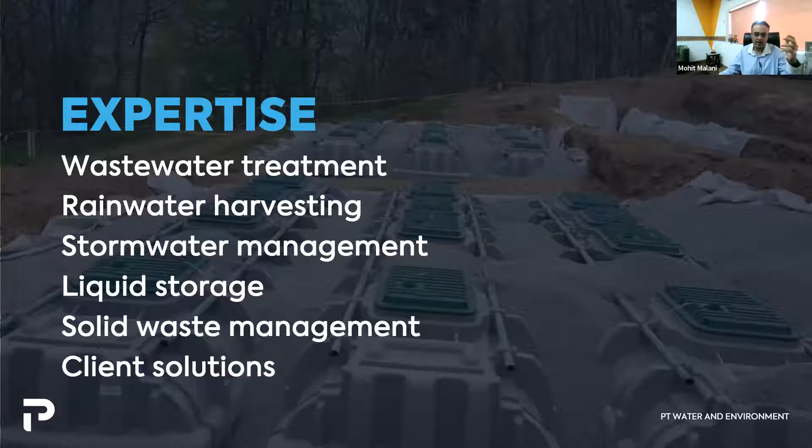We have a global footprint. We are across 3 continents in 11 countries with a total of 1,330 team members. Turnover this year has touched 235 million Canadian dollars, as of end of February, a 27% compounded annual growth rate over the last 20 years. We've completed 11 acquisitions in 12 years, including one acquisition in India in 2017 to accelerate our business there.

A key thing in our business is innovation. We need to keep improving our products and offerings. We invest close to 3.7 million Canadian dollars per year just in innovation, with a team of 59 scientists and engineers involved in this field.

The key markets we serve include wastewater treatment. We are one of the few companies in the world that provide solutions for individual homes as well as big municipal wastewater treatment plants. Within residential solutions, Ms. Kelly mentioned 60,000 installations, but for our residential systems overall we have more than 450,000 systems worldwide. We also cater to decentralized and municipal wastewater treatment solutions, with over 2,000 systems worldwide.

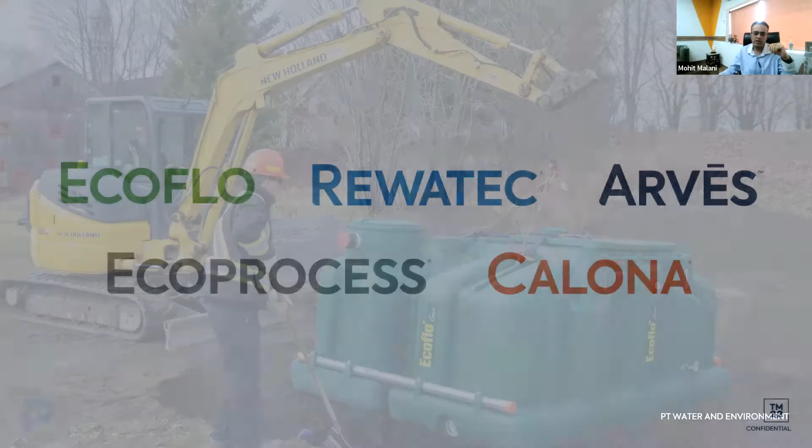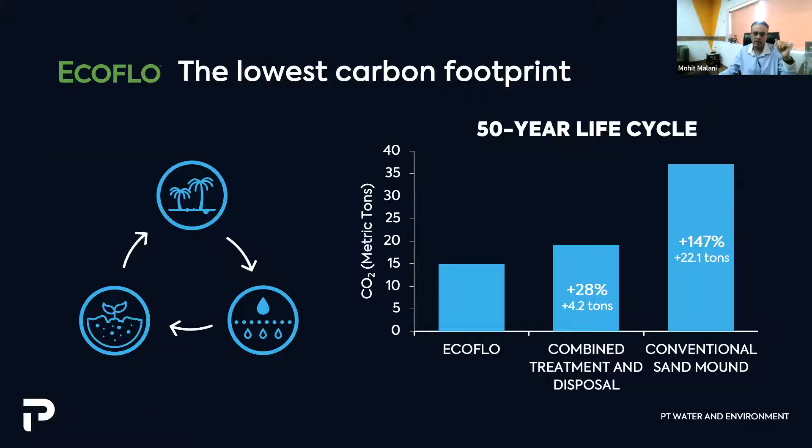Ecoflo is the most ecologically advanced technology for on-site residential wastewater treatment systems, with the lowest carbon footprint compared to sand mounds and everything else, across a 50-year life cycle, with the lowest CO2 emissions, which we are very proud of. It's a zero electricity wastewater treatment system for individual homes, a plug and play, passive system that needs little maintenance once installed.

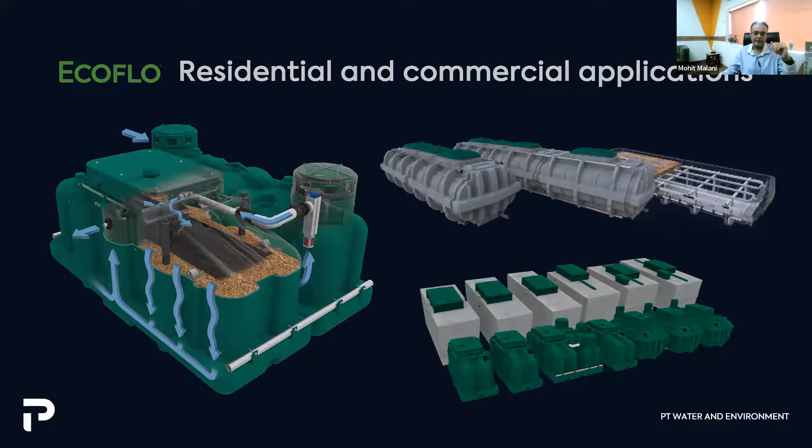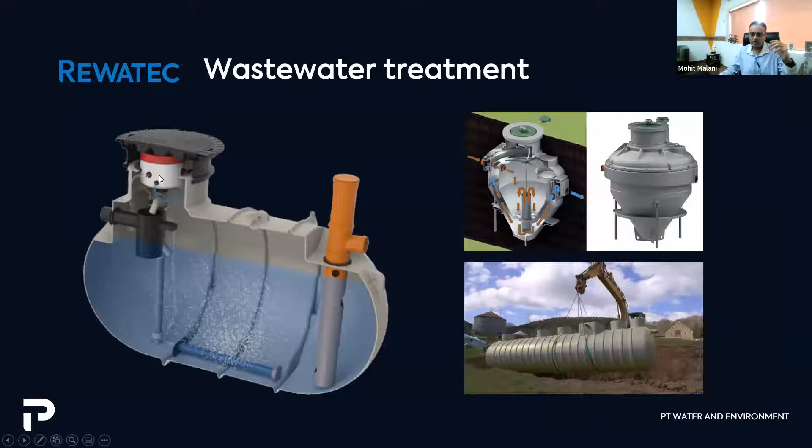In Germany, we also provide a mechanical decentralized residential wastewater treatment system based on SBR technology. It's simple, plug and play, and the electricity consumption is no more than 38 watts, like a light bulb.

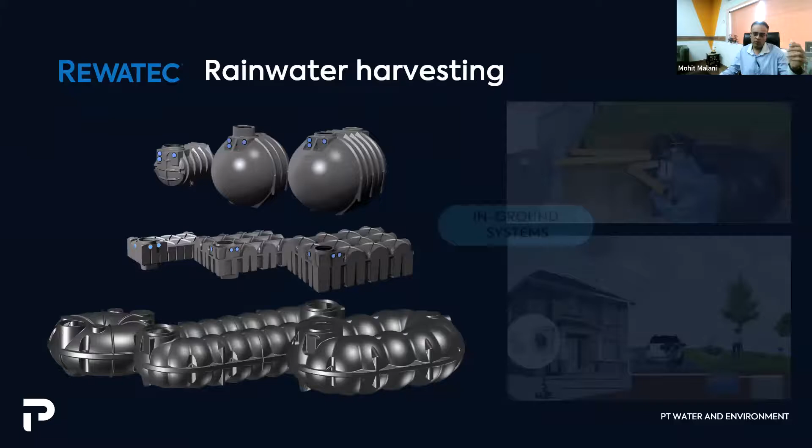We also have tertiary treatment in case we need to meet advanced discharge norms within residential systems. We manufacture tanks for rainwater harvesting that can be installed in homes as well as commercial and community buildings, along with stormwater management and hydrocarbon separators for airports when systems get large. These tanks are manufactured in Germany, roughly 50,000 liters each.

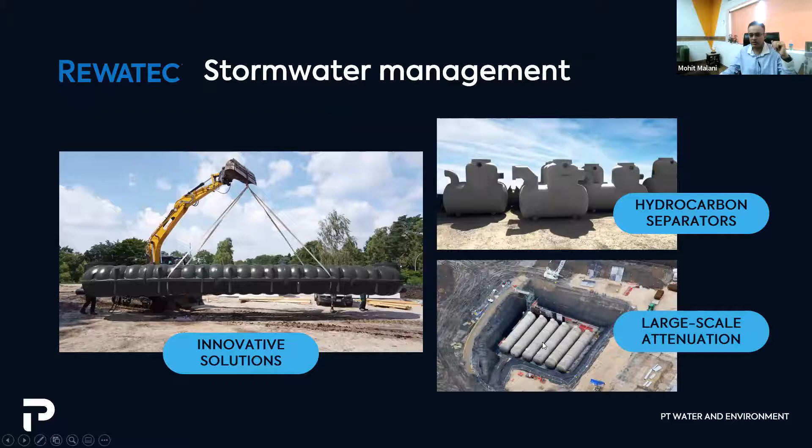We also do FRP tank manufacturing, shown in the bottom right corner picture. And because we do rotational molding, we also do a lot of liquid storage and septic tank systems as well.

Coming to EcoProcess, this is our municipal focus, especially in India, where we provide technologies like SBR, MBR, and MBBR for municipal and industrial wastewater treatment solutions. For commercial community clients like hotels, hospitals, and other establishments, we also do turnkey solutions for complete recycling wastewater treatment systems. Within projects and technologies, our biggest plant will be 136,000 meter cube per day, set up in Chandigarh.

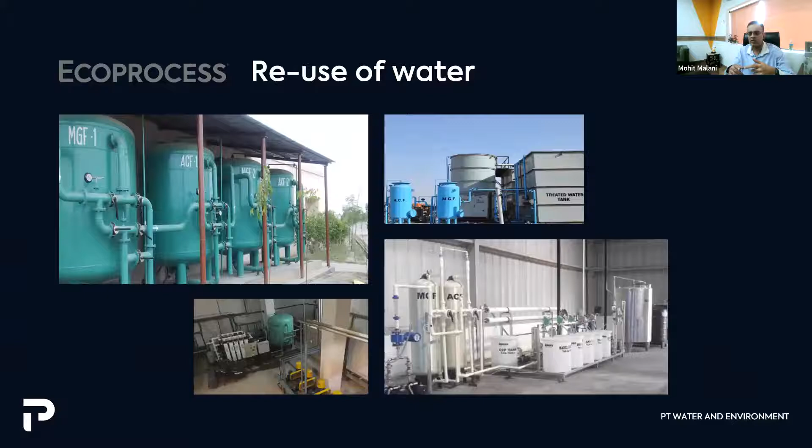In terms of a turnkey solution, we've done a 4,000 meter cube per day MBR system for L&T. This involves large-scale wastewater treatment systems as well as reuse of wastewater, where we design and deliver a complete turnkey solution depending on whether the client wants to reuse water for horticulture, air conditioning, or even laundry.

And of course, we also handle solid waste and biogas, where we do the complete design engineering for that as well.

We also do decorative rainwater harvesting in Germany. For individual homes, we make these rainwater barrels to make your garden look good, and we provide these tanks as well.

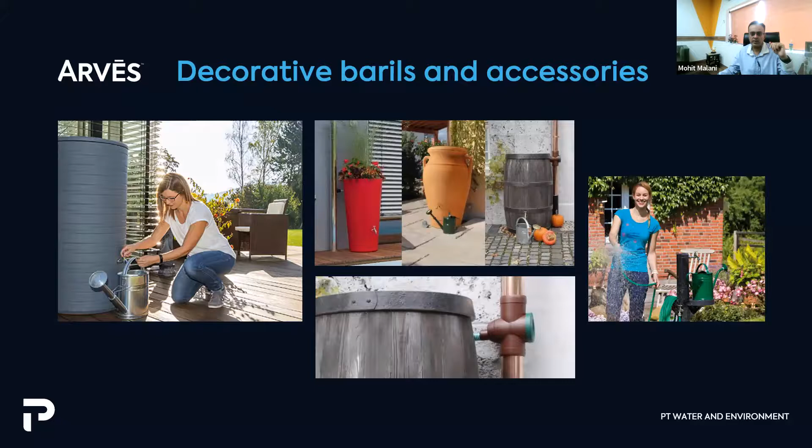We do not own the earth, we borrow it from our children. So let's improve and preserve it for the ones we love. We are Premier Tech, people and technologies making a difference.

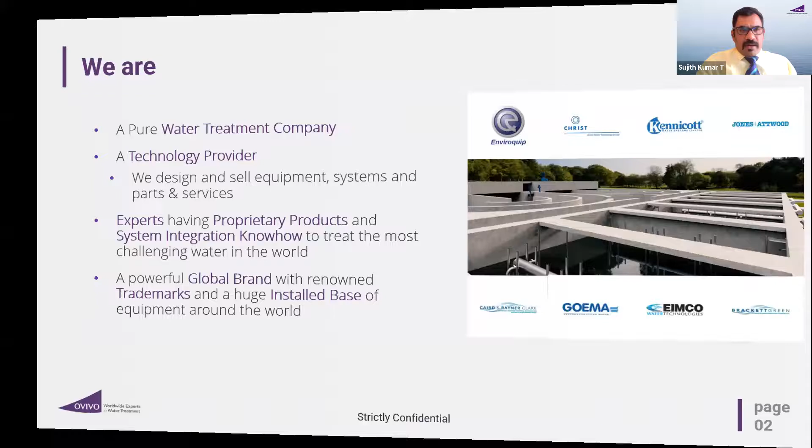To talk about Ovivo, we are a Canadian-based company dealing with water and wastewater treatment technologies. We have a combined experience of 150 plus years. Ovivo has grown by acquiring many companies across the globe. There have been almost 30 companies which Ovivo has acquired.

On the right-hand side, if you can see the picture, you name any global brand, most of them were publicly listed - be it Christ Water, Kennicott, Jones & Attwood, Goema. These companies have been acquired strategically to cater to various industries, be it municipal or industrial. Even in industrial, there are various verticals like pharma, pulp and paper, textile, tanneries. You name any segment, Ovivo has

a solution to offer, because it has got a wide range of technologies to offer - in fact, 200 plus. We have built an integral global platform. We are present in almost 5 continents, 15 countries.

India has been the center of excellence, or the knowledge center, right? We have been supporting the North American market and the European market, sitting in the India office. We employ globally 1,100 employees at Ovivo.

Obviously the head office is based out of Canada, and we, being a technology provider and a process designer, do close to Canadian dollar 500 million of revenue. This is how Ovivo has regrouped the strongest expertise in the industry.

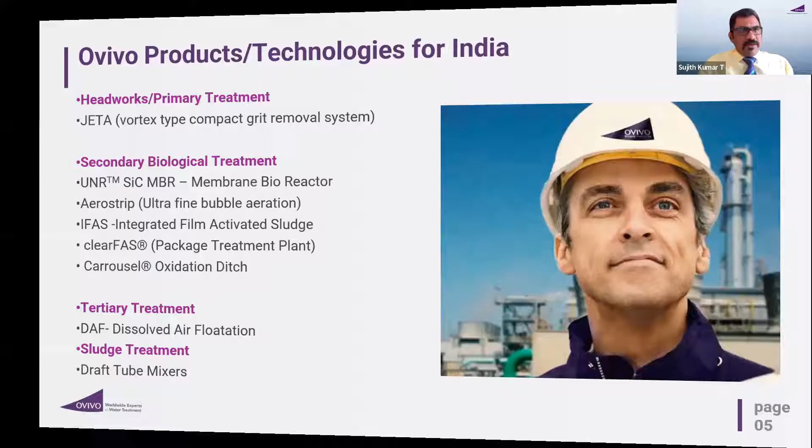To talk about India, we have a 60 plus team, with offices based out of Surat - our head office in Surat. We have a registered office in Pune and a manufacturing office in Pune. We have a branch in Bangalore, which is a sales office. With the team in India, though we have 200 plus equipment to offer in the global market, we are staying focused on Indian market offerings.

We have treatment solutions on the headworks treatment side, that is the vortex type grit removal system. This is vastly used for municipal treatments, large municipal size treatment plants, sewage treatment plants. On the secondary biological side, we have a silicon carbide membrane bioreactor, which is a bit unique - I'll be talking a few slides more on this particular technology. And we have an ultrafine bubble diffuser, which gives very high transfer efficiency because it disperses ultrafine bubbles, and the guarantee we can offer is up to 7% SOTE.

The other technology, which again is one of its unique kind, is IFAS - integrated fixed film activated sludge - which is an attached growth process. Most of the audience would have used MBBR, but this is better than MBBR, right? And we have a clearFAS system - it's a package treatment plant, plug and play unit, starting from 25 KLD to 250 KLD. Thereafter, one can go on a modular basis.

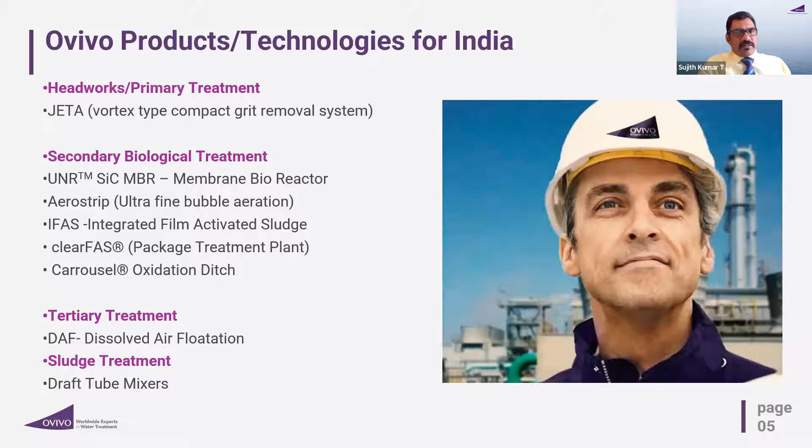On the tertiary side, we have DAF, dissolved air flotation, which is used to skim out the oil or suspended particles in the pre-treatment or on the tertiary side. And last but not least, we have treatment for sludge as well - the draft tube mixers, which are very efficient mixers used for anaerobic digesters.

These are a few products which Ovivo India offers. I'll be talking more about MBR. The topic itself is on Ovivo silicon carbide membrane technology, which has got limitless possibilities.

I'll just briefly touch upon what MBR is and talk about the challenges in a few slides. I'll not take much time, as Kailash has restricted us to 10 minutes.

What is an MBR? Many of you know it's a membrane bioreactor coupled with an activated sludge process. It's a state-of-art technology which delivers the ultimate treatment quality. The treated water from MBR looks crystal clear, as good as bottled water to appear.

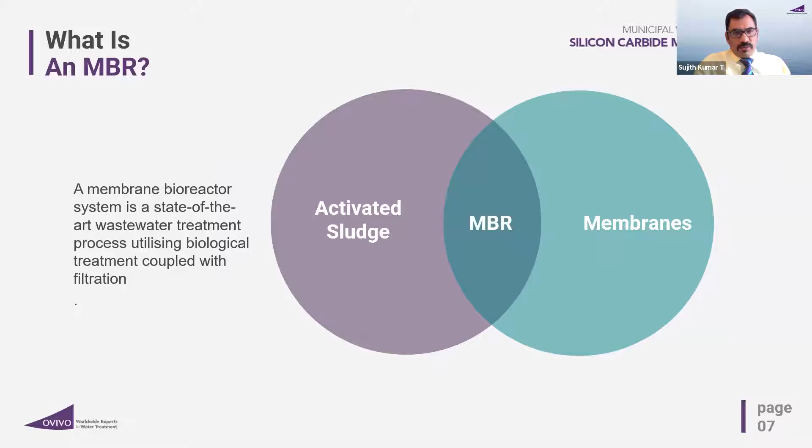In a typical MBR design, you'll have fine screens, an anoxic basin, an aeration basin, and an MBR tank with the RAS system, return activated sludge. In the anoxic basin, denitrification takes place, and in the aeration basin, carbon degradation happens. The BOD gets converted to CO2 and H2O, and nitrification converts ammonia to nitrate. Thereafter it goes to the MBR tank where you filter out the clear water, giving you the ultimate permeate water quality.

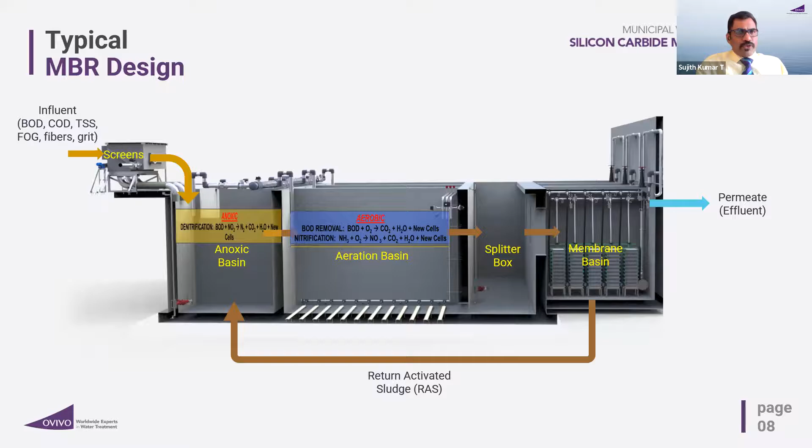Usually the quality you get is BOD less than 5, TSS less than 2, turbidity less than 0.2, and we can even target TN10.

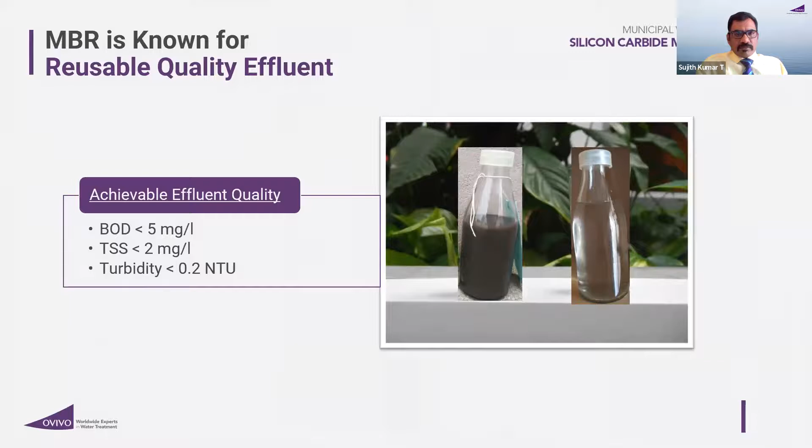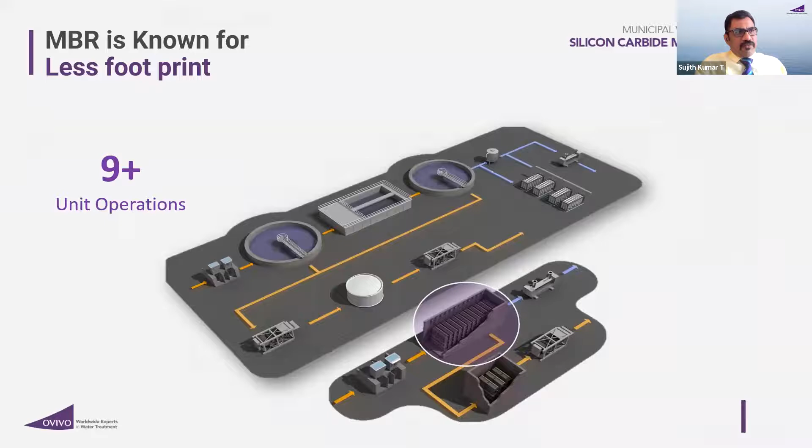MBR is known for less footprint, and that perception is absolutely right. If you see the conventional treatment system, it needs 9+ units of operation, whereas with MBR it's simple - you need only 4 to 5 steps of operation.

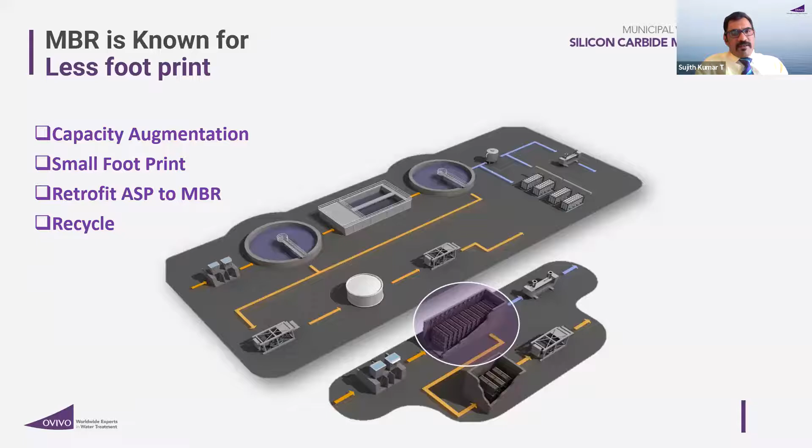The main advantages of going with an MBR are capacity augmentation and very less footprint. Retrofit from ASP to MBR - any system can be converted to an MBR process - and for those targeting recycle and reuse, they definitely need to opt for an MBR system, since it delivers the ultimate water treatment quality.

It's known to have less footprint, but the membranes could be challenging. Let's figure out what those challenges are.

MBR could be challenging - most of you who have used membranes would have encountered these problems: frequent cleaning, durability and robustness issues, premature replacement, permeability and recoverability issues, chemical susceptibility, and TMP limitation. These are the problems associated with any membranes.

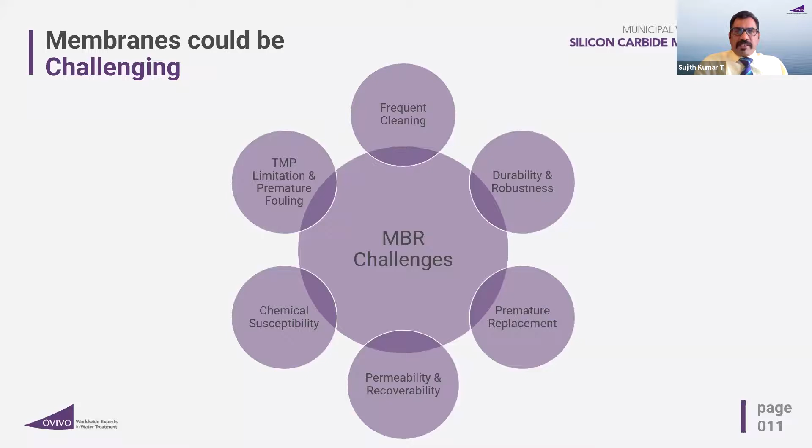I won't get into detail - those interested in this product can get in touch with me, as mentioned in my last slide. Ovivo has got a next generation SiC membrane which has limitless possibilities and overcomes all the issues I've spoken about.

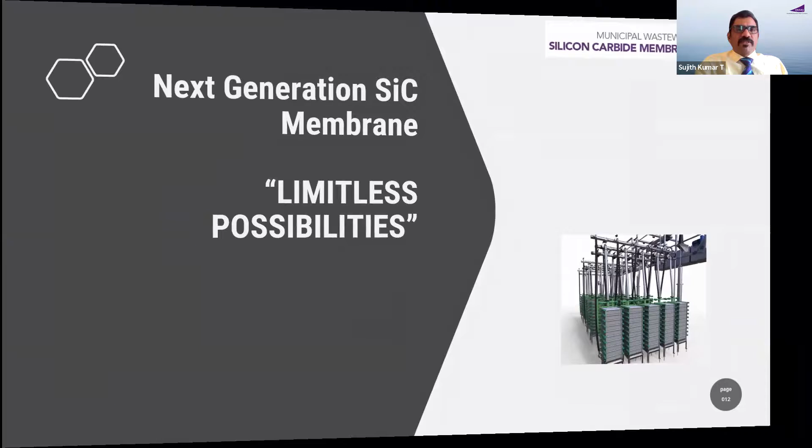Now, available membranes have flux limitations - you cannot go to transmembrane pressure more than 3 psi. Membranes are hydrophobic in nature, have high fouling propensity, require frequent cleaning, and are sensitive to chemicals. Warranty you typically get is 2 to 5 years.

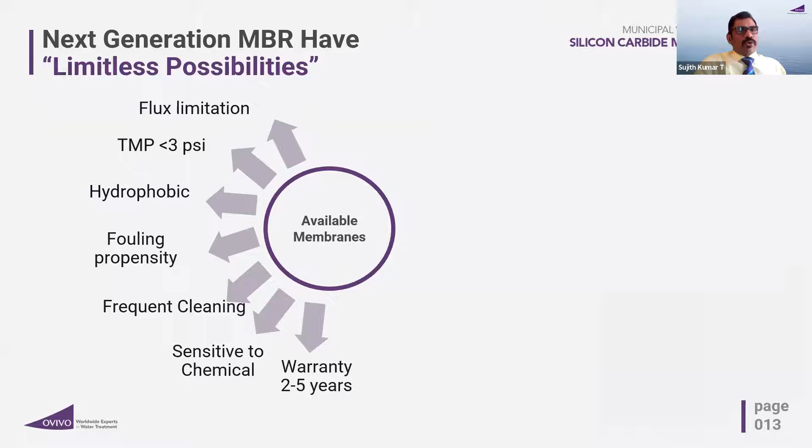With advanced limitless possibility SiC membranes, you can go up to 3 times the flux. TMP can go up to 10 psi. It's mostly hydrophilic, and it repels oil because it's also an oleophobic membrane. It has the lowest organic adsorption, meaning the fouling propensity is too low.

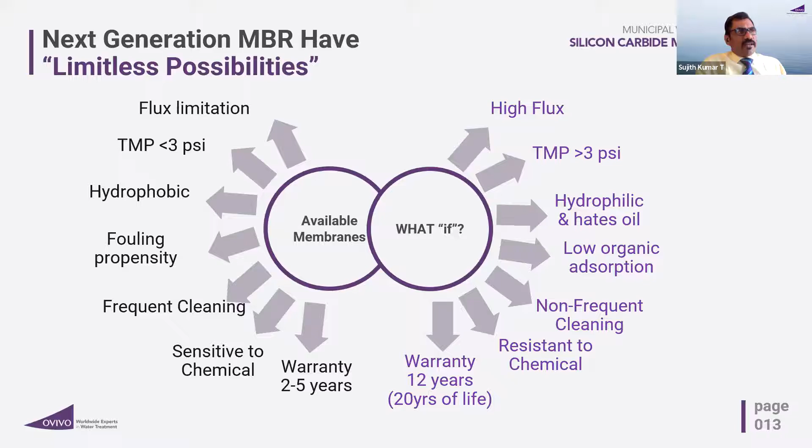This means non-frequent fouling and non-frequent cleaning, because the fouling propensity is very low. It's resistant to chemicals - you can operate or clean these membranes from pH 1 to 14. These membranes are made of inert material - silicon carbide, which is the toughest material after diamond. The warranty you get is 12 years, with a life of 20 years.

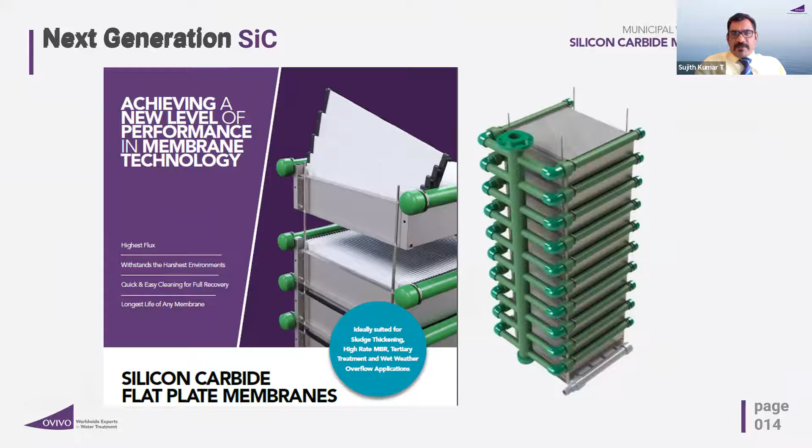This is how the membrane looks - it goes vertically. The one module you can see on the left top side has a 6.04 square meter area. Thereafter, you can stack it up to 15 levels, then go on expanding horizontally.

These are the key benefits: high operating flux, wide range of operating MLSS up to 45,000. It's a hydrophilic and oleophobic membrane, negatively charged. You can go up to transmembrane pressure of 10 psi, pH range is 1 to 14, highly chemical resistant, and temperature withstandability is up to 80 degrees.

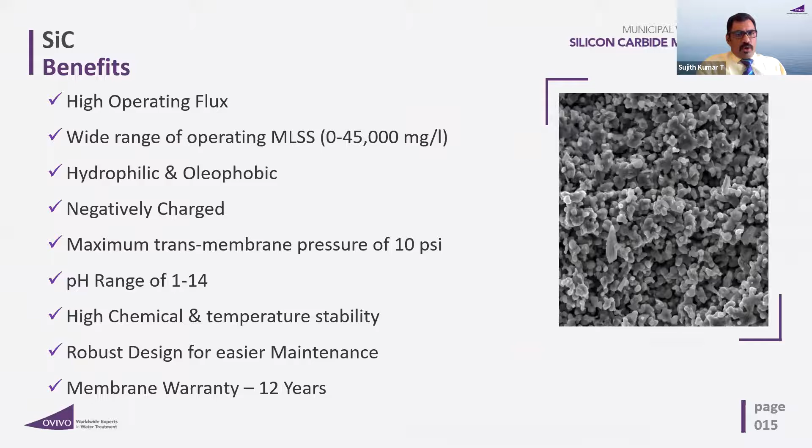It's very robust and easier to maintain, and the warranty we offer is 12 years with a life of 20 years. We have hundreds of installations - in India we have many, and globally we have more than 450 plus installations of this membrane.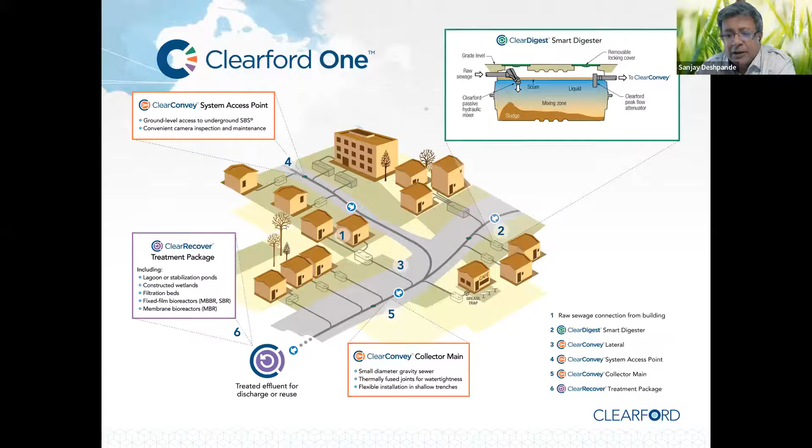So our system has three components, like I said. There is the anaerobic biodigester. Our biodigester basically takes the head pressure of the source water and creates a mixing zone within the tank. Every time water is used, and we collect all the black and gray water, we create mixing by just directing the flow according to the size of the tank. So you get this mixing happening, and that allows the anaerobic bacteria that are naturally present.

We don't put in cultured bacteria. We don't use chemicals, we don't use electricity in this tank. That process then digests the organics and settles out the inorganics at the bottom.

At the opposite side, we have a device called a peak flow attenuator. Since we had this tank, we shifted another component that you normally see in an STP here—that's the equalization element. By reducing the outlet diameter of the attenuator, we prevent solid objects from entering the pipe network and simultaneously causing a backup to happen here.

So when the water is used more, say in the mornings, the level in the tank will rise. In the afternoon, when usage is lower, it will drop. Same goes in the evening, and it drops again at night. So we equalize the flow here.

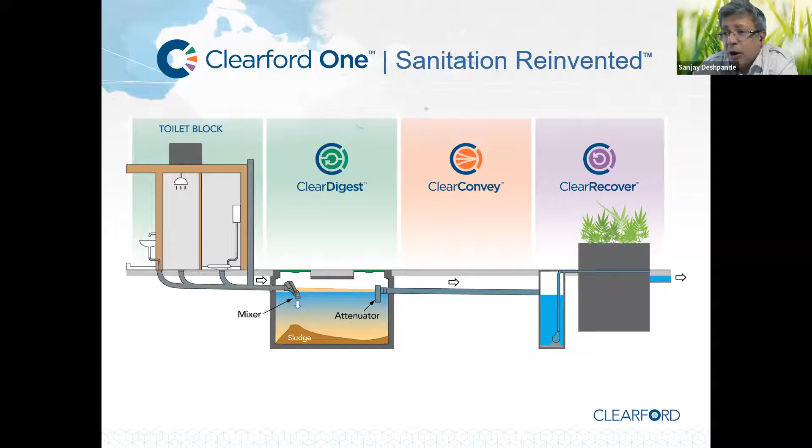As you can think about it, we are operating in villages where villagers have been trained to operate the system on a daily basis. That's how simple the system is.

Just to sum up: faster installation time—if you're an urban body or a town, that matters to you. Much lower operating and maintenance costs—we have had design projects which are as much as 75% lower in operating costs annually. Maintenance requirements are much lower.

If you're an engineer, you know the headaches of having to clean sewer networks. You're basically treating the symptoms of whatever's blocking the sewer. In our case, since we have digesters throughout the community, if somebody is putting something in, it will affect their own digester. They may do it once, but they will not do it again. It makes your life easier.

No manholes. Groundwater contamination cannot happen in our system because it's a sealed HDPE pipe network. Similarly, there's no infiltration into our system. If you have a high water table or flooding in the rainy season, all that gets eliminated with our system—that means you do not have to design an STP over the capacity of the actual sewage load.

We can work in low water supply areas. We also have systems that can be modified to only collect gray water. For example, if your black water is being taken care of by a mixture of soak pits and septic tanks, we can actually tackle a community's gray water. We are doing that in India also.

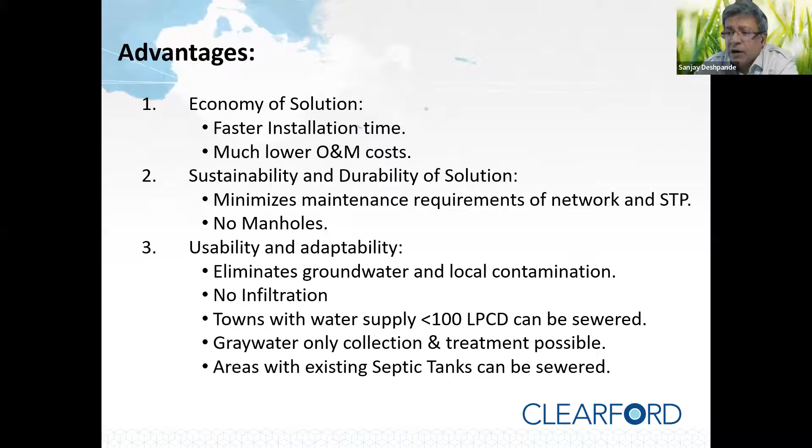If you have a community that has a mixture of septic tanks and soak pits and you want to sewer it, you do not have to remove the existing infrastructure. We can work with that infrastructure to collect the wastewater.

And that's it. We are happy to work with you, not only in India, but anywhere in the world. All we require is a good partner. These are my contact details—please just take a photo of it and reach out to me after the program if you have any questions or would like to work together.

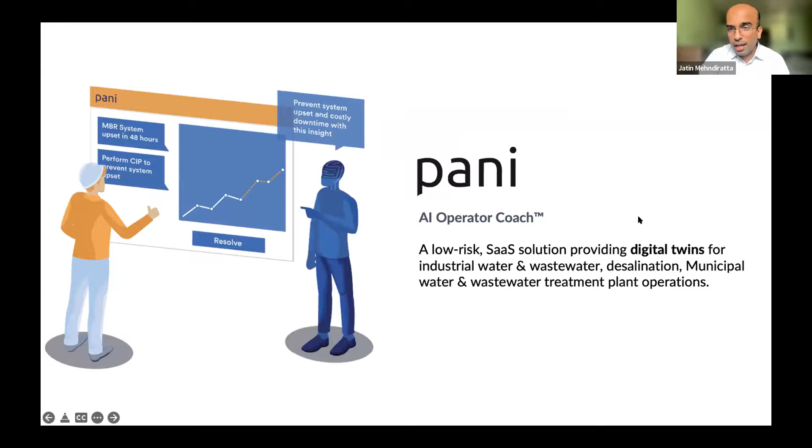As we're all aware, there are a lot of challenges in the day-to-day operations of plants, whatever technology you are using. It could be in terms of operations, streamlining how overall communication is happening, what operators are doing, streamlining customer experience, plant performance, and OPEX cost, or it could be in terms of maintenance or having unplanned downtimes coming into the plants.

Last but not least, especially in the industrial and wastewater industry, there is increasing compliance coming in from regulatory bodies. Whether you are a service provider, a plant owner, an O&M company, or an OEM, all of you are dabbling with these three major challenges and trying to solve them on a daily basis. This is where Pani has created a solution that complements what you're trying to do.

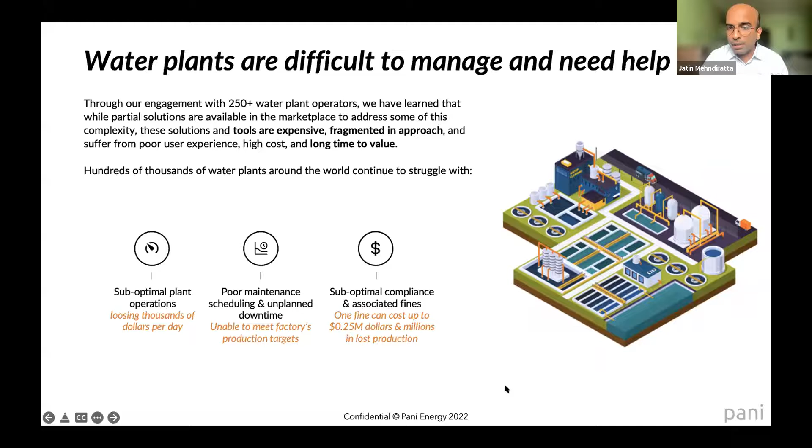All our technology is based on IoT and artificial intelligence, and it is purpose-built for water treatment. We don't do anything else; it's a very specific organization building technology for water treatment. We are available across 3 major applications: industrial water, wastewater, desal, as well as municipal water and wastewater.

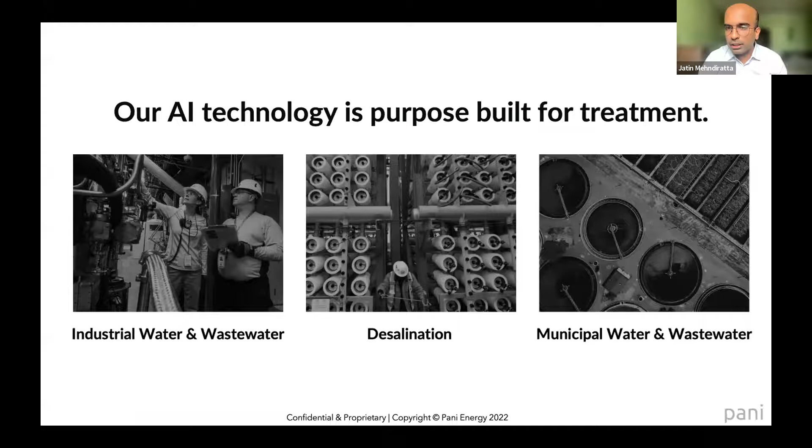In terms of overall footprint, we started almost 4.5 years back with 6+ years of R&D. We have done almost close to 250 dedicated visits and more than 1,000 interviews with operators and OEMs of water treatment to understand what we are, and have been recognized across the globe for the technology we have put forward. Very recently, we were named among the top 100 companies in the clean tech space in 2022. Now let's get into what we actually do.

All our technology is available as a web-based platform. This could be accessed through your laptops, PCs, existing mobile phones or tablets. You don't need any extra infrastructure to use our technology; you just need a device with internet access.

Now, how is it used and what do we do? You can integrate your existing sensors, or digitize your existing log sheets. So whether your plants are manual without sensors, we add value there. If your plants already have sensors, you can integrate those to the platform. If you have a hybrid mix where operational data comes through sensors and other lab data, logging, or maintenance activities are manual, you can feed all of that data into the platform, and it will start giving you automatic dashboards, alerts, notifications, insights, recommendations, and analytics of what is happening in your plant, what is going wrong, and what you can do about it.

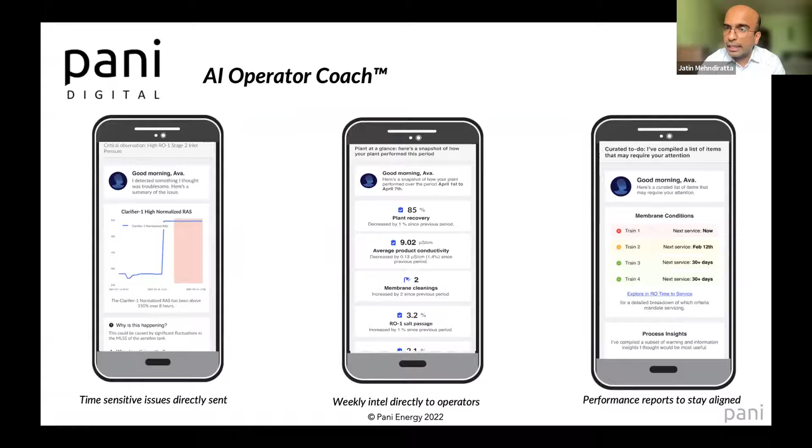Last but not least, on our higher tiers, it gives you performance reports automatically—for instance when you have to service the plant or provide CIP—so that your operating and maintenance staff stay aligned to the performance of the plant and are fulfilling the KPIs.

Now, the most important thing is the product, called AI Operator Coach or AI Coach, which is available in different tiers. There are two major values we provide: measure and optimize. Measure is for plants starting their digital journey—either you don't have sensors, or you've just installed them and only want to monitor performance and what's happening in your plant. There we have two tiers: starter and base.

The only difference is starter is for plants which have manual data, while base is for plants where you have sensors, maybe a PLC or similar, and can integrate that data to get real-time data. You can upgrade from starter to base at any point in time—so if today you start with starter, and after 6 to 9 months you plan to install sensors, you can upgrade to base with a click of a button.

All of this is available as a subscription, much like Netflix, Hotstar, or Amazon Prime, so you don't have to worry about cloud or server infrastructure—everything is taken care of by Pani Energy. You just have to subscribe, get your plant up and running, and all of that cost is available as a monthly, quarterly, or annual subscription, whichever you prefer.

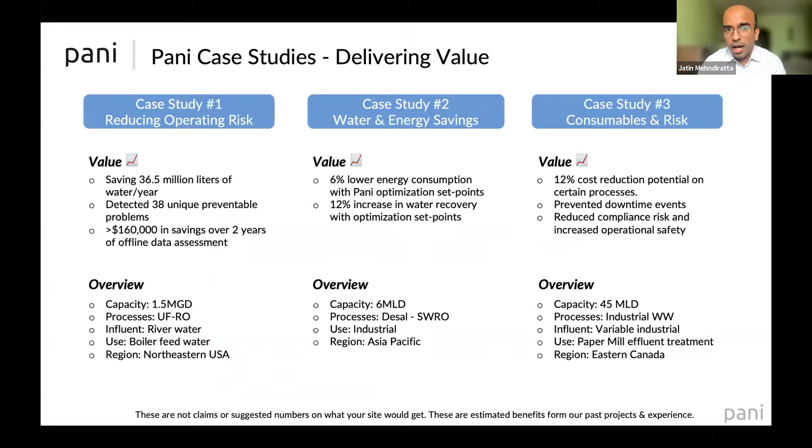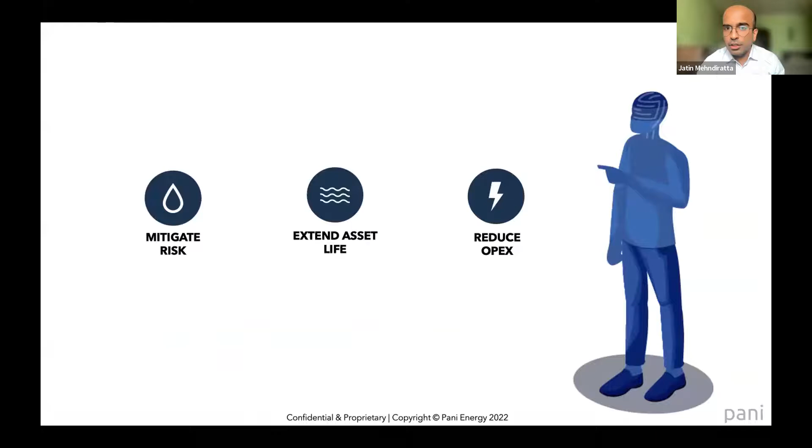Sure. It is proven across the globe. We have some major brands using us, from industrial wastewater, top 5 companies in the water treatment space, as well as some municipal customers and OEMs. So in case you are an OEM, an O&M player, a service provider, or a plant owner looking to solve these problems, feel free to get in touch with me, and we'll be happy to understand your problems and support you with our solution so you can monitor and optimize your plants.

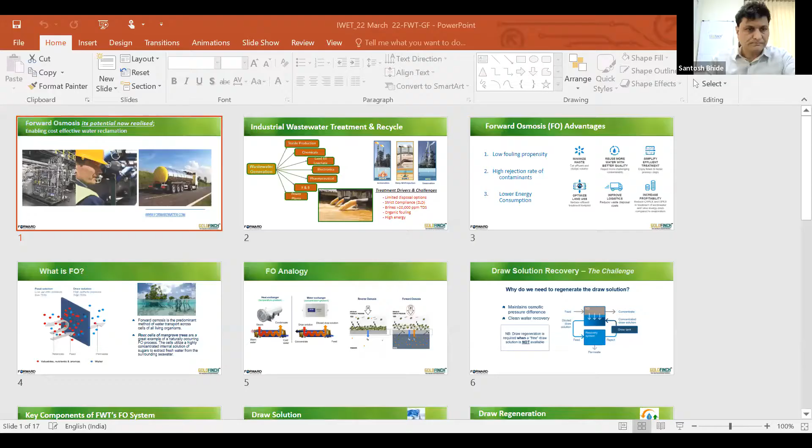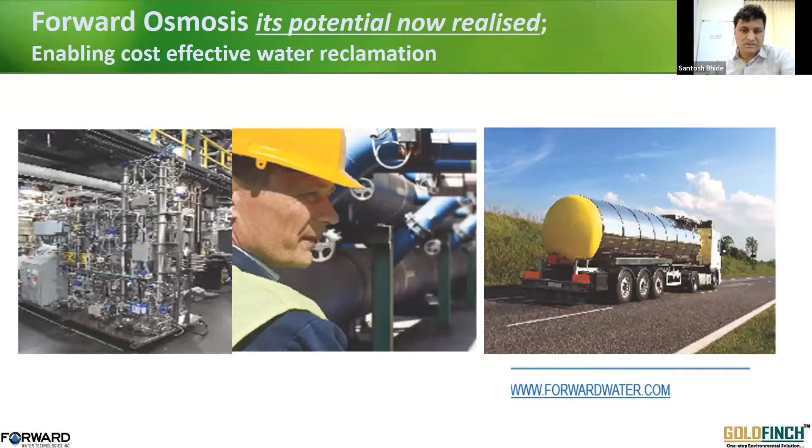Forward osmosis - we have been hearing about this in the field for quite a few years now, but somehow the commercialization has not taken off much. So I will be talking exclusively, trying to walk you through the innovation which Forward Water Technologies of Canada has done to realize the potential of forward osmosis.

The keyword here for using FO or forward osmosis would be the driver being ZLD, or zero liquid discharge, when we are talking of industrial wastewaters. In India, ZLD is a keyword now, and stricter compliance, limited disposal options, water scarcity, etc. is driving us to use ZLD options in spite of higher operating costs such as evaporation. Organic fouling and higher energy are other challenges.

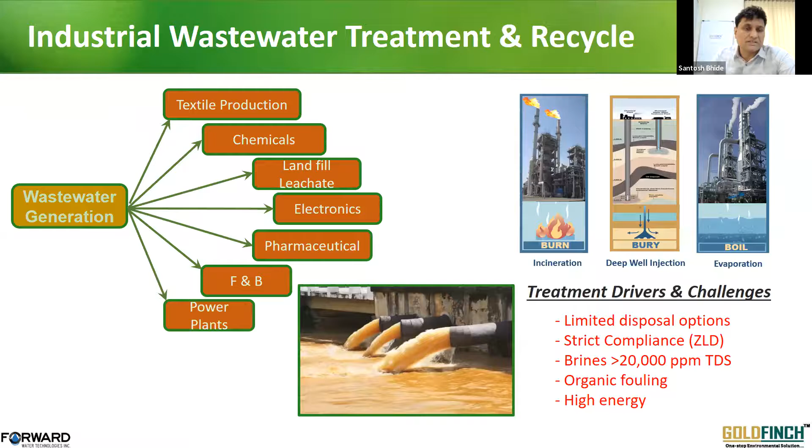So come in Forward Water Technologies - how can we mitigate this? We need a solution which gives similar results: high rejection or similar rejection rates of contaminants, and at the same time low fouling propensity. In RO there is a limitation when there is high COD in industrial wastewater. At the same time, lower energy consumption facilitates a simpler treatment train with fewer process steps, and increases profitability because the operating cost is low due to lower energy consumption.

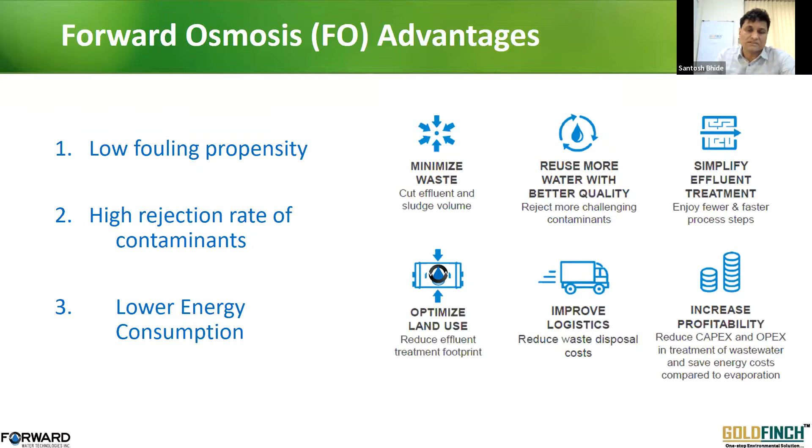So let us first understand what forward osmosis is. Forward osmosis is basically a process copied from nature - the membranes used are biomimetic membranes. If you take the example of mangroves in a saline zone, their roots are still able to take water from the saline water because they generate a higher osmotic pressure solution inside their roots, and the root acts as a semi-permeable membrane which draws the water due to the osmotic gradient.

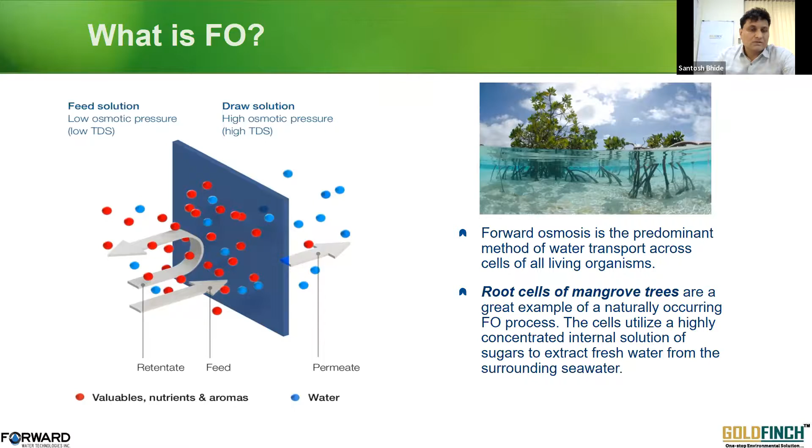Similarly, on the left-hand side of this diagram, the blue sheet is the semi-permeable membrane. There is a feed solution, which is our target solution, and a draw solution, which has a higher osmotic pressure than the feed solution. Because of the osmotic gradient between the two solutions, the water travels across the membrane and enters the draw, whereas the valuable nutrient or pollutant we want to reject remains on the other side, resulting in a concentrated feed solution. So this is the mechanism. If we compare it with a heat exchanger, which exchanges heat between two fluids, this is a water exchanger - an exchange of water between two fluids having different osmotic pressures.

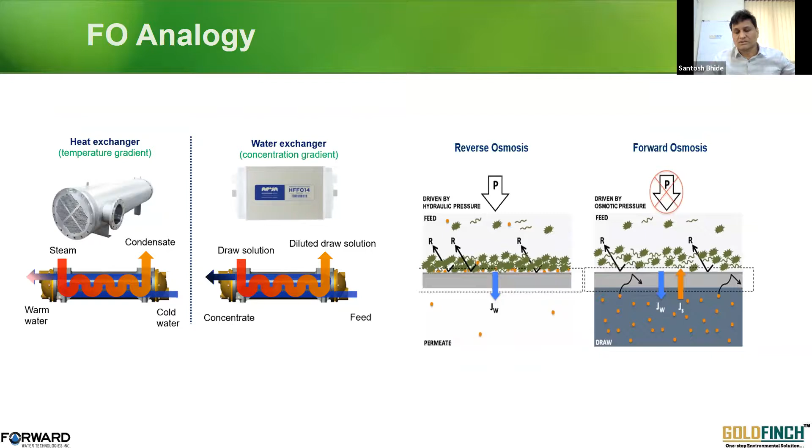Comparing it with reverse osmosis, which is a pressure-driven process where you apply very high hydraulic pressure depending upon the dissolved solids concentration of the fluid. In case of forward osmosis, the driving force is not hydraulic pressure but the osmotic gradient, generated by the draw, which is another fluid having higher osmotic pressure than the feed. Because the driving force is not pressure, our membranes or this solution is a low fouling solution, and because there is no high pressure, it is a low energy solution.

So you have realized that we need to use a draw solution. We do not need to use energy like high pressure, but we need to use a draw solution, and we cannot have a continuous draw or an indefinite draw available, which otherwise would increase the viability or practicability of the solution.

At the same time, if we don't regenerate the draw to the original osmotic pressure - as you see in this diagram, across the membrane, when the feed is traveling and the concentrate is coming out, it is getting dewatered due to the osmotic gradient, and the water is getting mixed in the draw. So the concentrated draw becomes diluted draw, and unless there is a recovery system in place, we will not be able to maintain the osmotic gradient again.

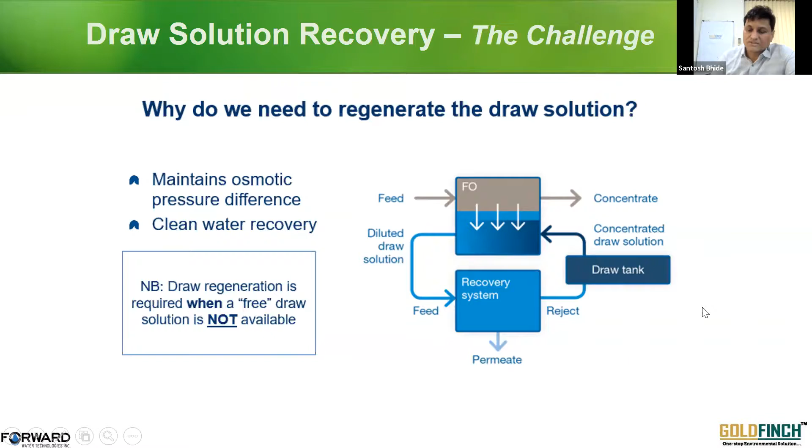At the same time, we are interested in recovering the water, which is the permeate here. So this recovery system was the major bottleneck in implementing the commercialization of forward osmosis, which forward water technologies has, we believe, overcome. So there are three components when we talk of this forward osmosis solution in ZLD.

One is, of course, the membranes. We have got very excellent membranes, biomimetic membranes, and the innovation by forward water is the draw solution. And third is the process key, which is the draw solution regeneration. So we are using a switchable water solvent salt.

So whenever I want to use a draw solution, naturally we need a very high osmotic energy or very high osmotic gradient to be generated. So this salt should be able to generate a very high osmotic energy. It should be very easy to regenerate it.

It should be a 100% closed loop system, so there is no salt migration on the fluid side. And the reverse salt flux we want to avoid, otherwise it will contaminate the water to be recovered. At the same time, it may increase the operating cost because we have to make up the draw every time. So what we are using is one aqueous carbonated salt, and it generates a high osmotic pressure.

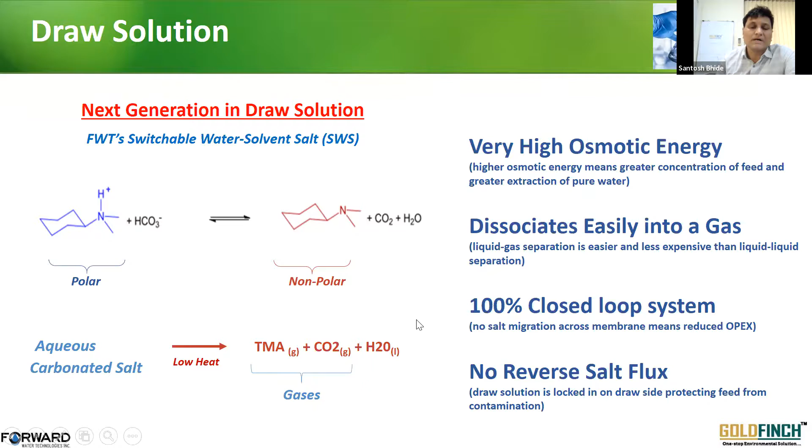On application of very low heat, it dissociates into gas, which is again absorbed back, and we can recover the water. So coming to the schematics, on the left-hand side, you can see the forward osmosis side.

This is the semi-permeable membrane. This is the feed input, the dark blue. The light blue thing is the water which is traveling across to the draw. Now we have got an absorber column here where we generate that original concentrated draw solution having that switchable water solvent. Now this draw facilitates the water to travel across the membrane.

As a result, the draw gets diluted. It enters another column, which we may call a stripper, where we are applying low heat, and it dissociates the gases which go back again to the absorber, generating the original concentration of the draw.

At the same time, the water which has traveled across the membrane into the draw through the column comes out from the bottom, which is the recovered water, which is clean water, good enough for secondary reuse. So this unique patented liquid gas separation process, or the draw regeneration process, has helped us to think of using the forward osmosis system for high concentration dissolved solids fluids.

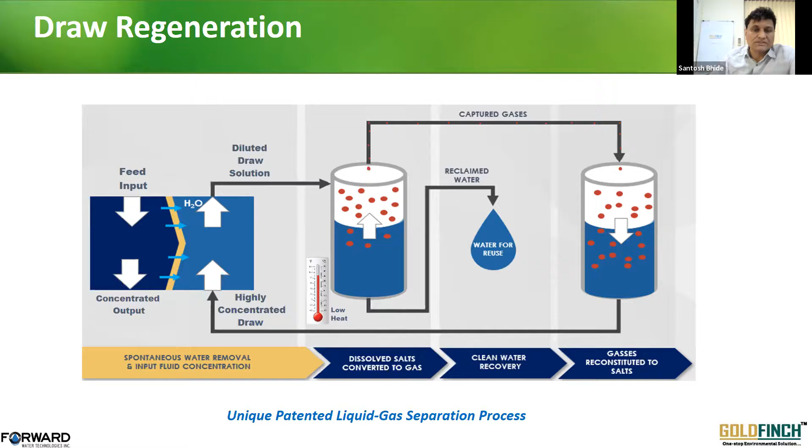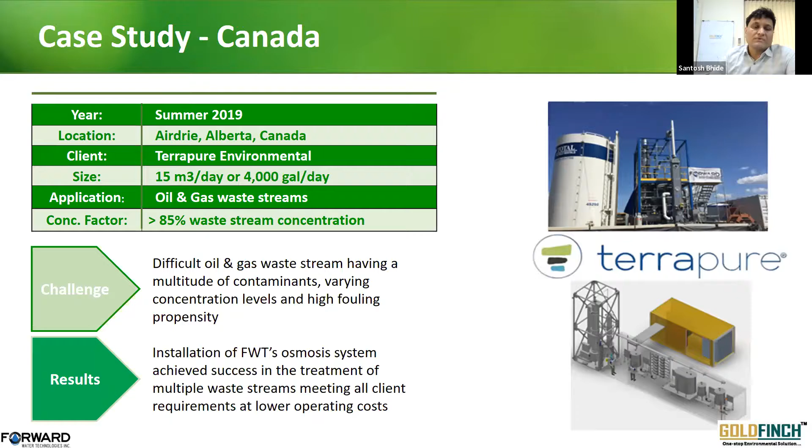Forward water has done many pilotings over the years. This is one example where a very challenging, difficult waste stream at 85% concentration was in - that means 85% water was recovered through it. This was a pilot in Canada; we have got a pilot set up in one industrial area in Maharashtra, and we have been doing many permutation combination studies on this pilot throughout the last one or two years.

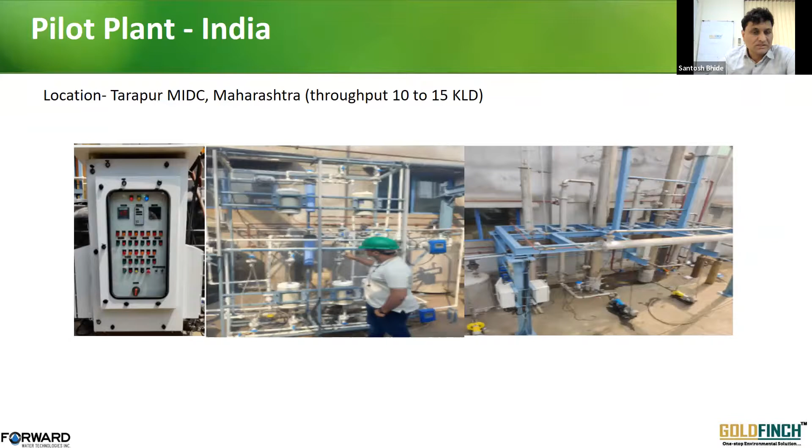So some data which I am sharing from this pilot, we have got one lean stream and one concentrated stream. So we did three types of runs: one using only the lean stream, one the concentrated stream, and the third option was mixing both these together. As you can see, of course we recovered more water when the TDS was less. From 20,000, we went five times up.

Even when the TDS was as high as 15%, almost, we could reach up to 20%, recovering some more water, which is very challenging when we talk of conventional available solutions. And in spite of the higher COD, you can see 29,000 COD in the feed, which is unlikely that any RO membrane will withstand. So because of the low fouling property of the membrane, we can do it.

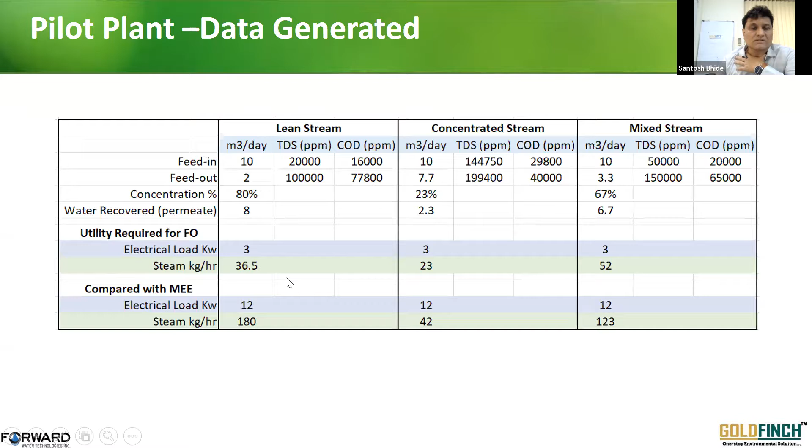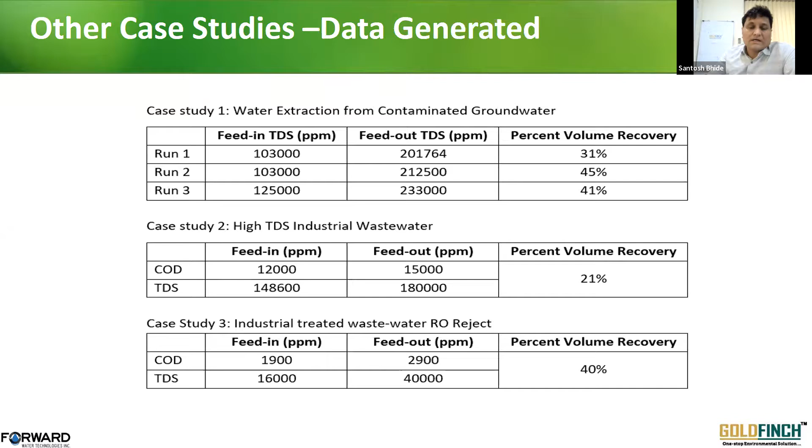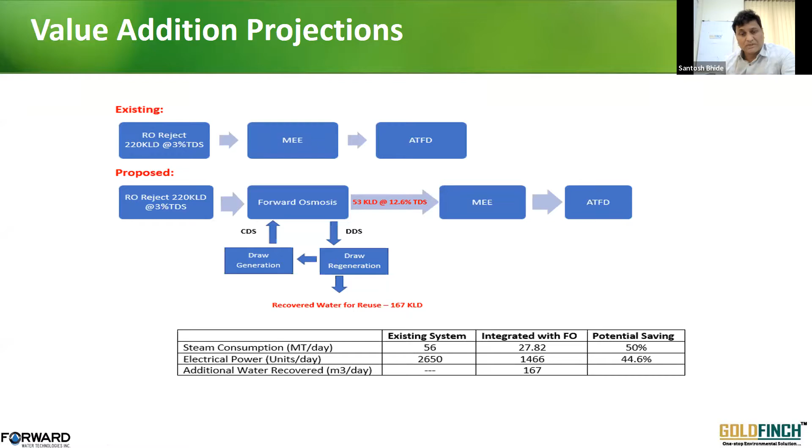If we compare the utility consumption, steam and power, which are the key issues when it comes to operating cost, the existing system versus integrated with FO, we are having almost 50% savings in the steam cost overall, and about 45% in the electrical power cost. So that is how concentration at a lower energy is feasible.

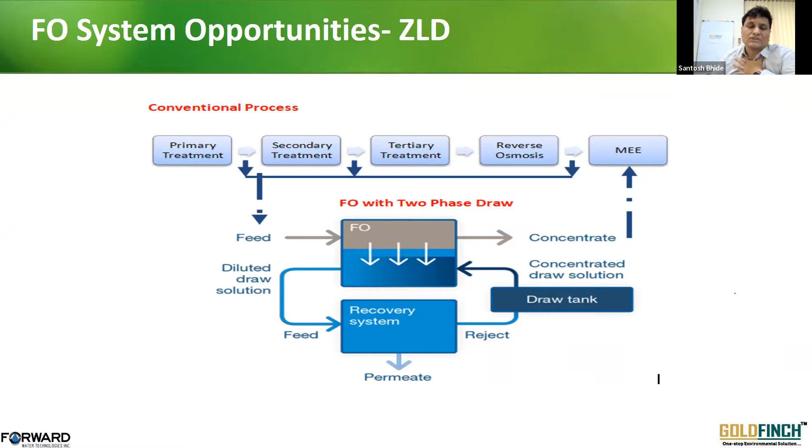There are, when we talk of a ZLD plant... Yeah, I'm almost done. We can integrate the forward osmosis system either after the primary treatment, replacing the entire ETP, or after the secondary treatment or biological treatments, or it can be used as a retrofit in the existing plant, concentrating the reject of the RO plant further. These options can be dealt with when specific data is available.